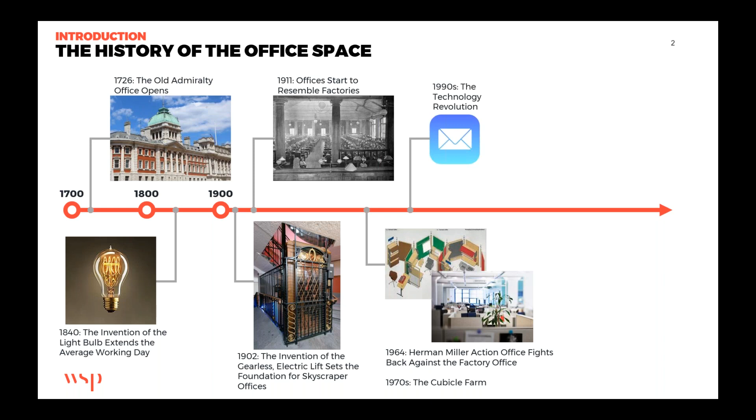Then came the technology revolution, the invention of email and everything else going on, which led to the working day following us everywhere. There was no break from work. It was always with us. Discussions of work-life balance started to be a hot topic in what we were doing.

And in the current day, we've moved back to those big, long desks under the guise of collaborative working. That's a picture of my office, and it's quite scary how similar it is to a factory of 1911, in how we pack people in and how they're working, and how we'll work going forward.

There have been huge waves, whether it's been the light bulb, the lifts, or the technology, coming in that change the face of the office and change how it's going to be treated and how we deliver our work from those offices going forward.

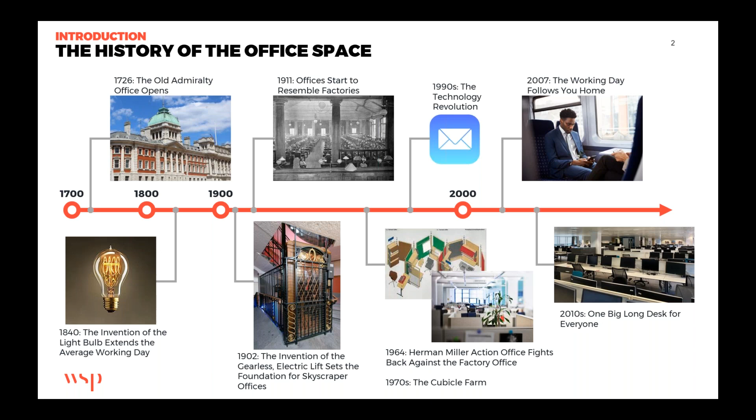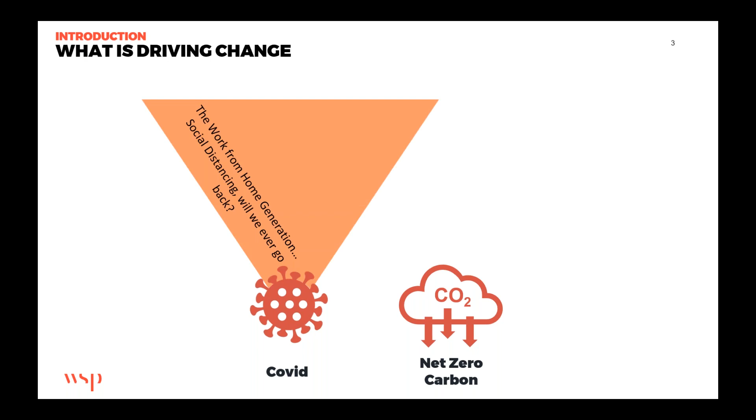Right now, we feel there's a perfect storm going on between the global pandemic situation we've been in and the ever-increasing drive to meet our net zero carbon targets and create sustainable buildings. This balance between what COVID's doing, creating people working from home and a dynamic office space, and the need for climate change action and driving efficiency into our buildings, is creating this future of the workspace.

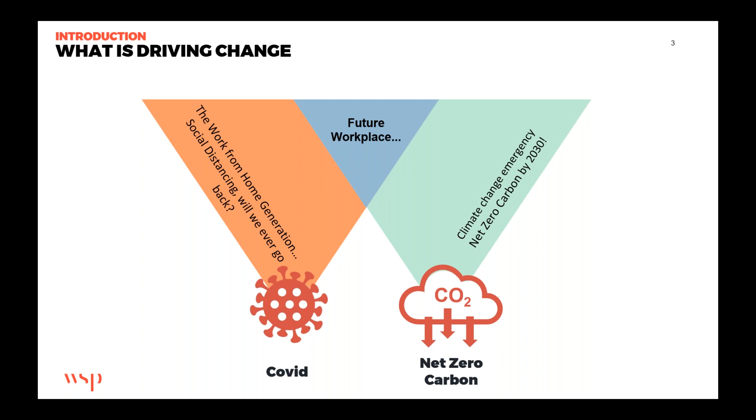Given everything we read in the press, without going into the social side of it, we see that the kind of office we abandoned for two years during the pandemic is probably a thing of the past.

You see all sorts of stuff and pictures about the future of flexible working, implying a workspace that is inviting and makes people want to come back to work rather than stay at home, to collaborate and integrate rather than sit at a desk and punch out numbers. That's potentially the future, and we see a lot of this going around in discussions in the newspapers, how companies are addressing it, and we'll see it in our own workplaces.

But what we probably don't realize in the background is that for those of us designing the detail and the engineering that enables these buildings, this changes everything. It changes the architecture in terms of the types of spaces we're designing, the finishes we're using, and the environment we're creating for people to work in. Behind that, it changes the fundamental basis of how we design.

How do people now enter the building? Everybody used to be at their desk by 9 o'clock in the morning, but now people are more flexible, coming in at different times of the day. So how does that affect the lift design? Do we need as many lifts? Do they need to move as quickly? Does that change the core and the structure of the building?

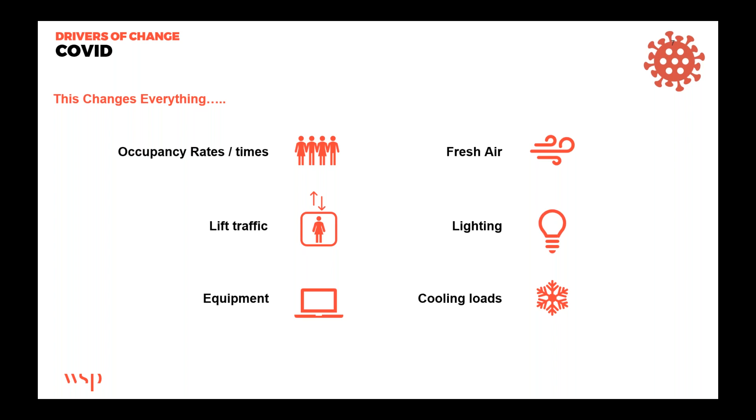So this little move to create more collaborative spaces that fit within the office space you're in actually changes the foundations of what we need to consider when designing the building.

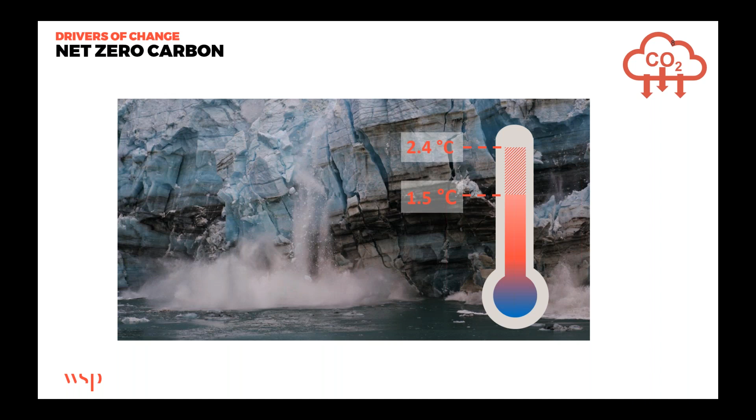Then add that to the net zero carbon situation and the global drive to maintain global temperatures at a certain rate. Without going into net zero as a whole, figures from the UK Green Building Council show that 40% of our carbon emissions in the UK are made up by the built environment. So our buildings, how we're operating and using them, account for a huge percentage of our UK carbon footprint.

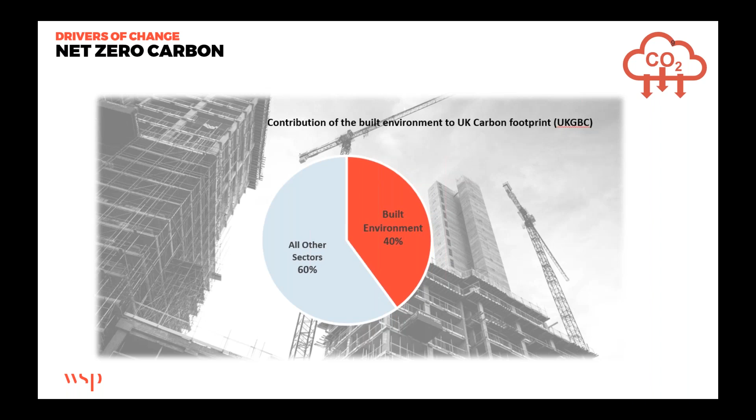So if we as a world of economies want to achieve a net zero future, we've really got to address the buildings we're in, and office buildings are a significant part of that. All across the globe we're seeing people commit to this. This isn't just everybody saying we need to be lower carbon, because we've been saying that for years and years now. This is seeing an unprecedented sign-up.

Whether it's 2030, 2040, or 2050 in your country, in your area, everybody's signing up to this net zero. We're seeing huge amounts of sign-up, with all the biggest companies vowing to cut their carbon emissions and announcing it. There are thousands upon thousands of companies that have signed up to the Science Based Targets initiative to try and achieve this net zero.

But do we really know what that means to our buildings and what it's going to hit with us? And the last impact that's coming from this, that's driving this element, is going to start hitting, whether we're developers or whether we're just part of the public that are designing this, there's an impact to the financial market that we're looking at with our buildings.

It's always been the case in the past when new regulations come out for new levels of green targeting, that the first people that develop those buildings and can advertise that their buildings are more sustainable will see increases in their rental premiums. They get this kind of green bonus to their building. But this is really a short-term boost for those most proactive, because as the market catches up and everybody's got a building like that, you don't have a unique selling point anymore.

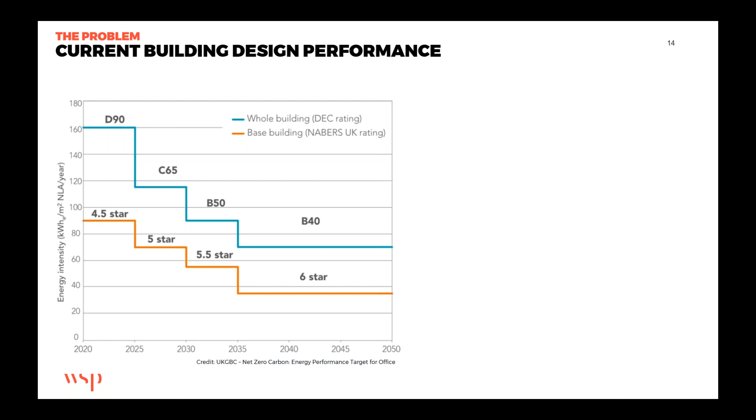So we went away and had a better look at some of our buildings. And we thought we need to compare our buildings to something. This graph that you can see on the page at the moment is taken from the UK Green Building Council guidance for an office, and it's in line with the NABERS UK rating. Anyone listening to this from Australia, this is all our stuff moving over to a NABERS rating from the Australian Green Star setup. We thought we'd have a look at this and look at the kind of ratings we need to be achieving for making a net zero building happen, and compare it to one of our buildings at the moment.

This is the energy rating from one of our current top performing office buildings that we're designing at the moment. This is achieving the UK Part L requirements. It's meeting the London GLA planning guidance. It's 40% better than Part L. It's meeting all the current guidance and exceeding it, and designing to the best practice that is put in place to meet our regulations at the moment.

And yes, these two graphs are at the same scale. You can see that if we want to achieve net zero, we need to more than halve the energy in the buildings we're doing at the moment. This struck a chord with us that this is a much bigger issue than we were giving it credit for.

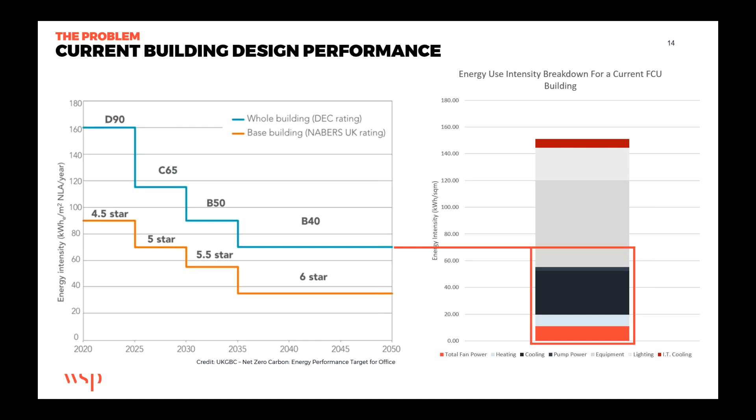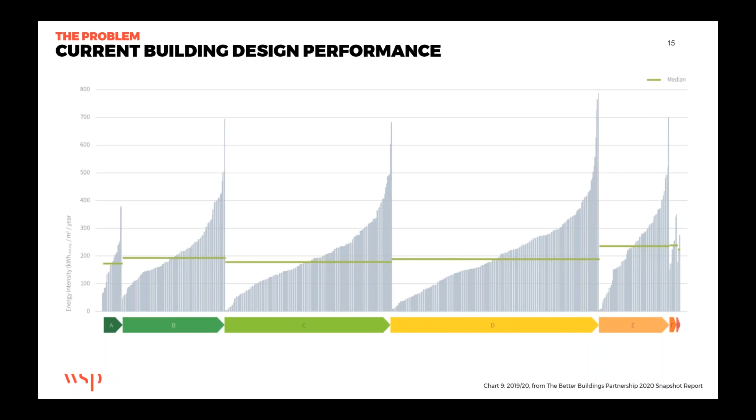The green lines in the middle show you where that average sits, around 200 kilowatt hours per meter squared. Our best building was looking at about 160. So we are in the good half, but there's still such a long way to go.

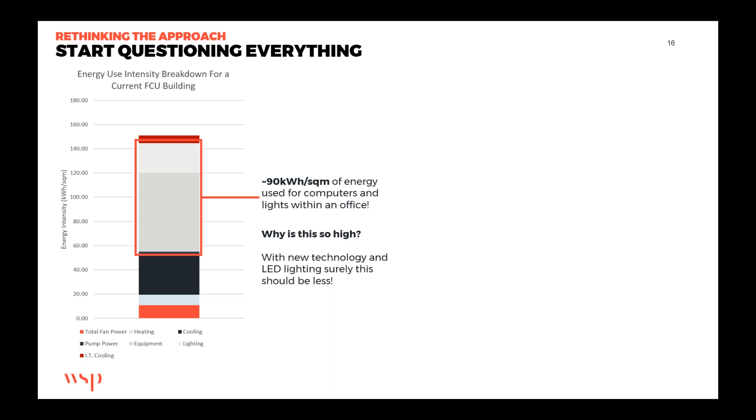This isn't a design issue now. This is a specification and operation issue for those using a building. You can see it's up at 90 kilowatt hours per square meter, and we need to be trying to achieve 70 total for the whole building. Surely with modern technology and LED lighting, it should be less than this.

This is coming from real data. This is looking at real operation of buildings and how buildings are seen to operate to get these figures. We're using huge amounts of energy out of hours.

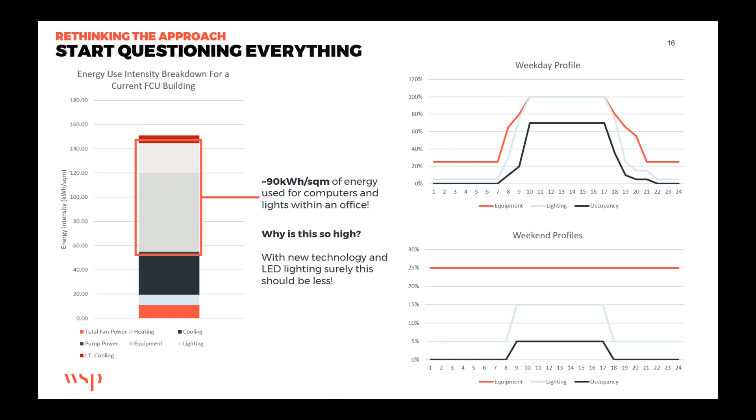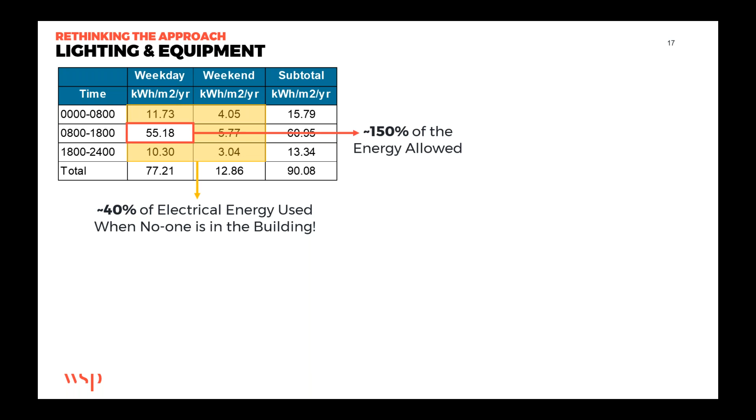But even the energy that is used when it's in the building is far more than we can allow for what's in there to try and meet these targets.

So performing some testing, we had a look at what would happen if we look to turn it off at the weekend. If we could control that, we could reduce the hours it's being used. And just reducing the hours it's being used didn't work on its own. We had to reduce the criteria we were designing to and the power allowances we were doing.

In the UK, the design of our office buildings is very heavily linked to the guidance produced by the British Council of Offices, and they give us direction on the kind of power consumption we should allow for in our designs, and the view of where that should be operating and what's going on.

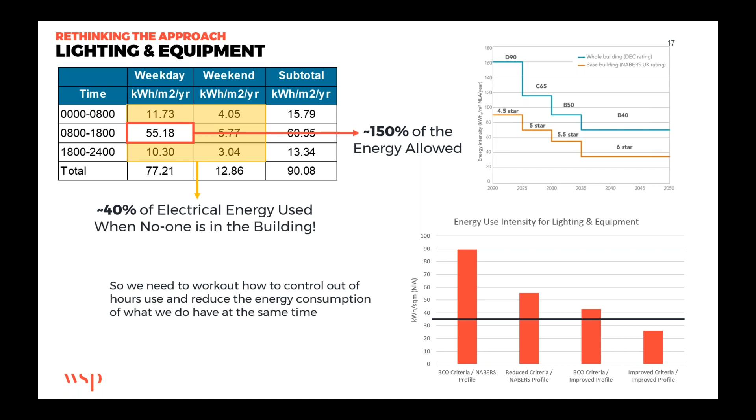What we found is that we need to not only look at the guidance we're designing to and how the industry needs to change its guidance, we need to look at how people are using their buildings, how they're operating them, how they're turning stuff off at night, and the types of equipment. This starts to become, the office of the future does not become something the design team can look at on their own. It comes into procurement of IT services that tenants and users of the building will be looking to use.

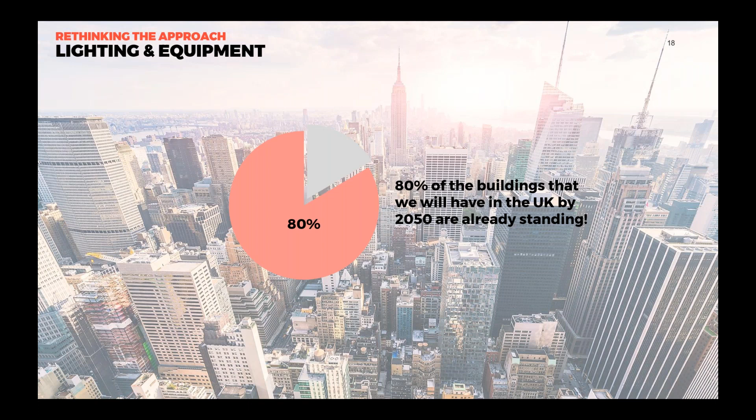But when you look at the UK, and this is similar around the world, it's predicted 80% of the buildings we're going to have by 2050, when we want to be net zero, are already built. They're already here to work with. So this isn't just a new build job. If we fix this in the new buildings that are coming, we're only going to address one fifth of the amount we need to address in what we're doing.

So we have a real problem with gathering this stuff, because if we're going to attack existing buildings and all these operators of buildings need to look at this and drive their energy down in collaboration with their tenants and how they're using their building, we have a real problem with data. We need to understand how a building's being used, where the data's going, where the power is being used, and how we're going to do it.

And traditionally, that gets hit by problems with our engineering systems being very disconnected and the information not joining up. And quite a lot of people want to keep their cards close to their chest. They don't want to share this data that's out there. So we need, as an industry, to be breaking down these barriers. And there's ways we can do this.

There are lots and lots of emerging technologies and strategies that can be developed around smart buildings that can gather this data, analyze it, help us understand the operation of these buildings and bring this stuff together. And in terms of sharing our data, as things like NABERS UK gain more traction and potentially become legislation in the future, we will have to advertise what rating our buildings are. We will have to tell people where we're at. So that data will start to become apparent and we can start to tackle it.

But it means change for all of us. The way we design the building, the technology we put in the building, the criteria we're setting, the way we're selling those buildings, all of these areas need to come together to think of the office building as a different environment for presenting the information that we're doing.

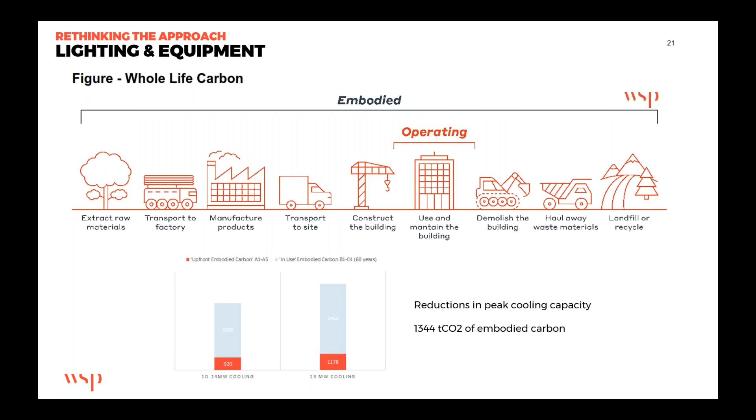Now, this is a big development, but those proportions happen across all the developments. These MEP systems, these large plant systems and everything that goes with them have huge embodied carbon impacts as well. And more so than structure or facades, the engineering systems have a life cycle cost because they get replaced. So the smaller they are, the less we replace, the less impact we have in the future.

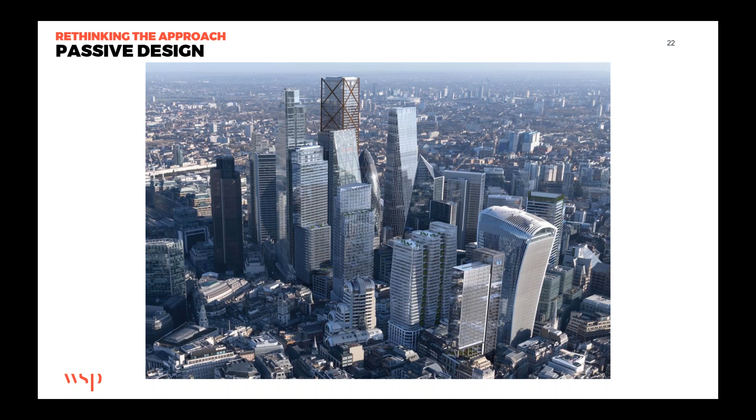Then we thought, having looked at the operation of the building, we have to go back to the basics. So we've talked about changing the specification and changing the criteria of how people use the building. We need to look at the way we change and design buildings. And we questioned ourselves as to whether buildings like this were a thing of the past. We've designed a number of the buildings in this picture. We love designing these tall buildings, but they are all great big, huge glass buildings.

If we've got to halve our energy consumption, can you design buildings like this, or are they a thing of the past? Now, I don't think any of us really know the answer to that. It's going to be a juggling act. But we did start to look at some of these impacts. Now, for those that don't understand the numbers, it's not important at that point.

The numbers at the top of the page here are a high performing current specification for a facade design. And what we did was we took that and simply applied improvement factors at 10, 20, 30 and 40%. And we thought, we'll test this and see how much it improves the energy consumption. So those percentages are percentages of the energy consumption we're improving. And we thought, actually, these are tiny numbers. So potentially we could look at keeping those buildings how they are.

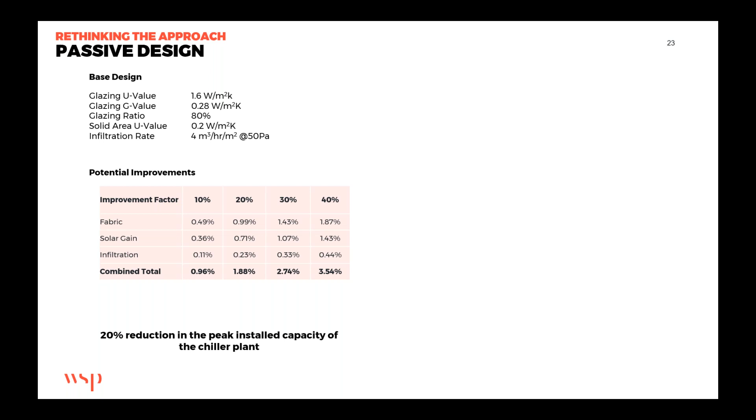But when you then relate it back to the engineering systems, while they look like simple numbers in the kind of energy consumption area where it is, that's a 20% reduction in that peak cooling capacity. So again, we're back to this whole life cycle, this embodied carbon consideration. We were also looking at various buildings, and this is one of those buildings in that cluster of pictures I just showed you.

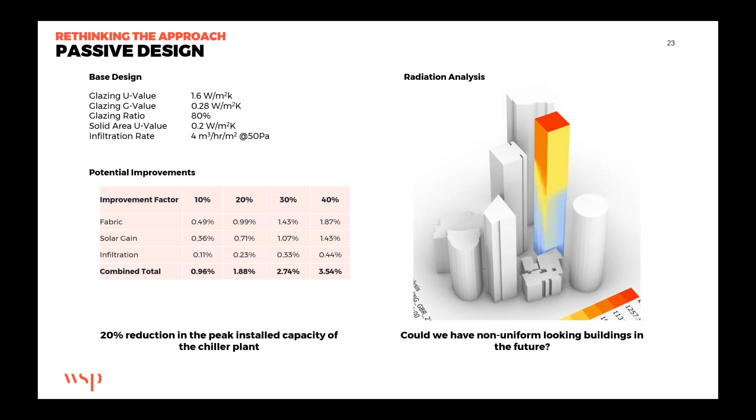And actually, do we need to think about our buildings differently? They're so uniform, they're glazed all the way up them, they're the same all the way round on a lot of stuff. But based on the shading and whether we're facing north or different orientations, do we need to stop our buildings looking so uniform? Do we need to think about each facade differently, design them differently and create what they'd look like differently?

So we actually built an optimization engine that did a bit of testing here, and we let the computer try to give us the answer, try to tell us what would be the optimum facade for this building. It's a very simple square building, so it's just north, south, east, west. And we had a look at that data to see what it said.

It looked at a number of situations, and it came up with this mix of lots of glazing on the south facade, but huge amounts of shading to block out direct sun. It allowed reasonable amounts of glazing on the eastern facade, but it really didn't like the western facade. And then obviously on the northern facade for the UK, lots of glass, no shading, let all the light in.

And that went all the way up to having a windowsill height. An awful lot of our buildings have no window sills. They are glazed floor to ceiling. But if you do the analysis, that bottom meter of a building's glass does nothing for the average daylighting on the floor, but it lets lots of solar light in. Putting that sill height in did nothing to the daylight. After that, further reducing glazing ratios beyond that did affect it.

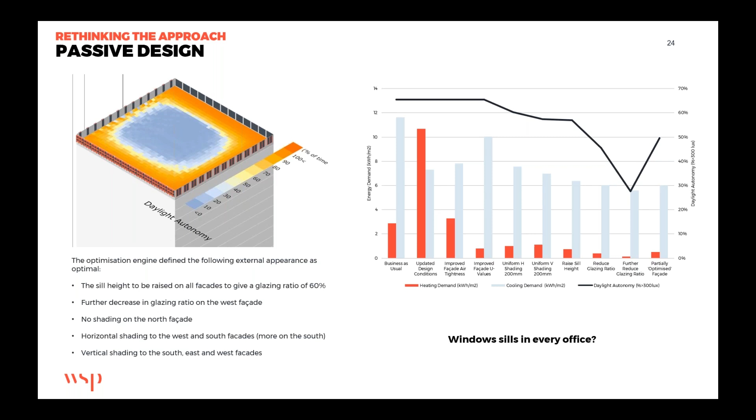So I think there's a balance. We believe as a company, and through our analysis, that there should be a balance to it. But are those things of the past? I would say there's a bigger consideration to be had, and things like sill heights and shading are going to become a much greater thing in the future for designing buildings.

One of the last sections we looked at is the engineering system. So we've looked at the brief, we've driven the brief down, we've understood how people are going to operate the building, we've got the people in the building to operate as efficiently as possible. We've passively designed it so that the least amount of energy is being consumed. So then we need to look at the engineering systems.

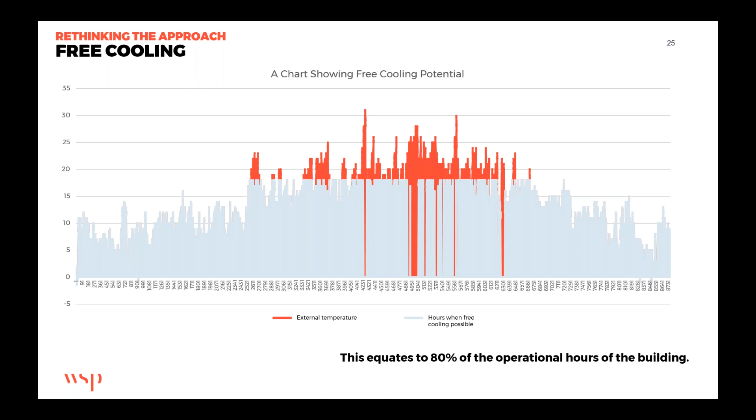And for the UK and anywhere in the world that has similar temperate climates, the ultimate solution for us was to look at free cooling. If you look at our weather file, which is what I'm showing you here, for 80% of the operational hours of an office, the air temperature outside is cold enough to do the cooling we need inside the building. And we don't typically do this at the moment.

Some of that is stigma around opening windows. We sort of say, right, if we're going to free cool, we'll open the windows. But there's all sorts of problems from that. For anyone who's designed an office building, there's problems with single-sided ventilation not getting deep enough into our floor plans, or you get people at the window who are comfortable and people inside the floor plate who are uncomfortable, or vice versa, and windows opening and shutting and arguments, and it just becomes difficult.

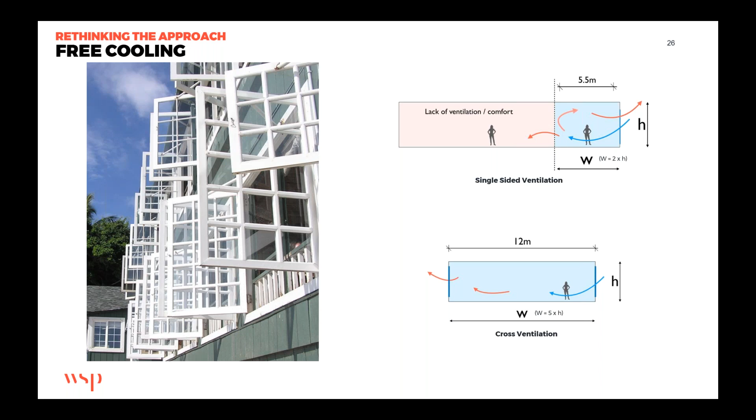Not to mention the added cost and the loss of energy from air leakage, because these aren't tight facades in the winter. So it causes us problems. So we don't typically see this on our large office buildings anywhere in the world. Another reason for it, which is where we've driven as a market, is we have been net area driven, getting net area up, value out of it. Every penny we can sweat from our office spaces has been massively important.

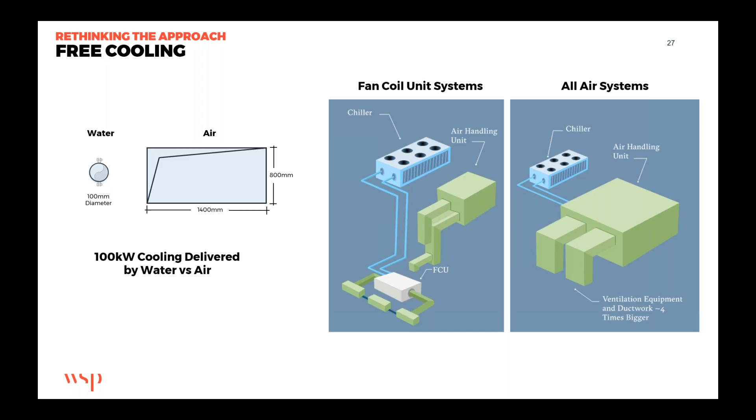So just saying we're going to do fresh air isn't going to get us there. We as designers and engineers need to think of different solutions. We at WSP have been looking at hybrid solutions that look at gaining connection to facades on office spaces while maintaining minimum fresh air plant for the winter seasons, and looking at how we can get this free cooling optimized into the space so that you can still have a sealed facade, you can still have the air tightness, you can have the minimum fresh air space efficiencies, but you can still have the free cooling.

And there'll be a number of solutions to this, and we as designers need to address this, but also we need developers and everyone who has signed up to these protocols to think of carbon over area a bit. None of these solutions are going to be ever quite as area efficient as the minimum area solutions we've been focusing on for the last decade of designing office buildings. But they have to remember that this small loss in area is going to get more than covered if the predictions that are coming from the industry about this brown discount become true. So we need to look at these solutions and work together.

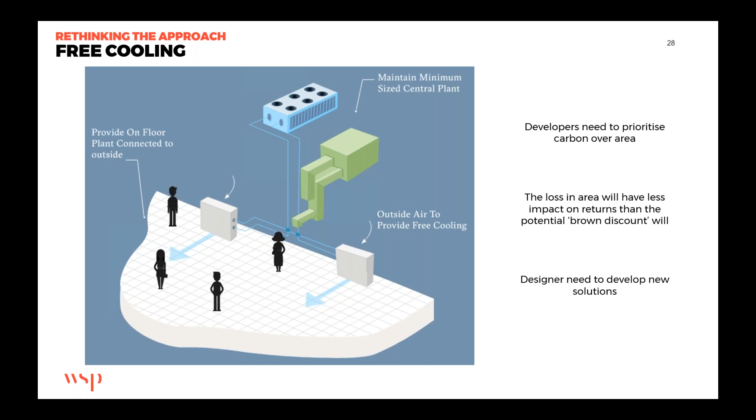As a little parting thought, as I said, I focused incredibly heavily on the operational carbon, and there is the drive for these operational carbon things coming in, like NABERS, where owners of buildings are going to be judged on the operational performance of their buildings. So we have to start to consider this, and we can't just design a better building from an engineering point. We can't design the architecture and operate a building how we've always done before and have the engineering solve it.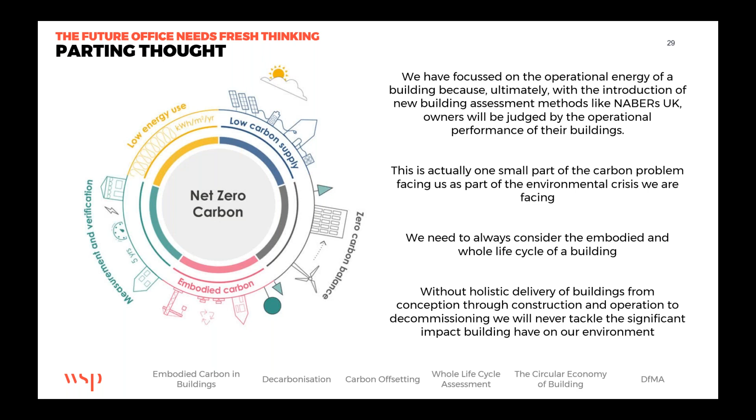It becomes a solution that everyone from developer to client to letting agent to operations and management to designers needs to consider. While we're doing that, we need to consider the whole life cycle costing, and without all these people involved, without a holistic delivery from conception to construction, we're never going to tackle this office of the future that needs to address everything for everyone.